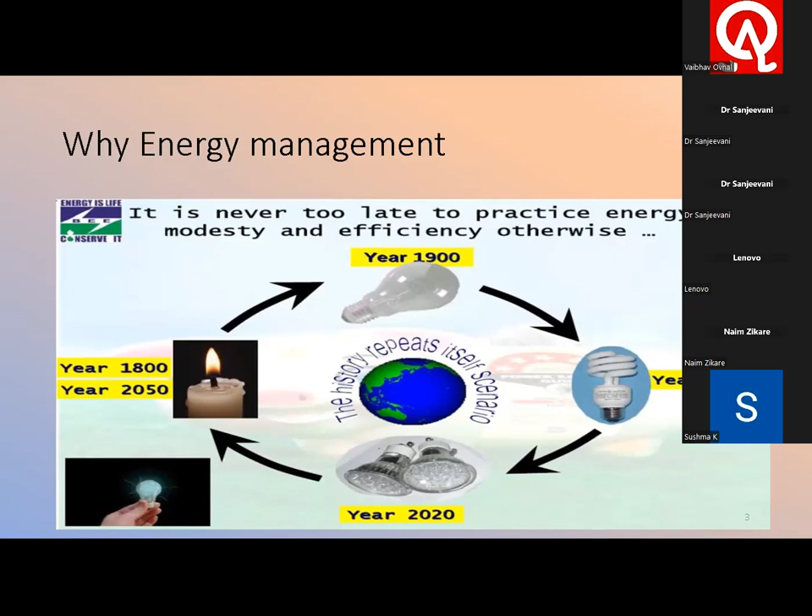Team, all of us can manage to read by candlelight, or rather we can cherish candlelight. But can we run machinery on candlelight? Of course not. So unless we take some proactive steps for energy management, we will no longer exist in the business. So in a nutshell, energy is a lifeline for our business activity. If we have to be in the business, we have to be energy efficient.

Now, understanding the management system 50000 family. 50003 gives you the guidelines for the direct and indirect impact calculation for certification and the related customers, how they should be evaluated, talking about the controls on the certifying body. 50001 is the accredited certifiable standard.

50006 gives you the guidelines for basically working out the baseline, and measurement is derived through 50015. 50047 talks about how to calculate the energy saving. Most of the time, measurement and instrumentation plays a big role.

There is always measurement uncertainty, or there can be a conscious misrepresentation, what they call greenwashing. In real life, energy is not saved, but it is projected as being saved. Such misrepresentation has to be avoided if you're going to claim benefits associated with the improved version.

Of late, efforts to claim the benefits associated with green efforts have triggered some malpractices. And to prevent such things getting certified, we have more and more stringent guidelines coming up. So all of us who are professionals in management systems need to know these fundamental standards and start working in whatever role we wish to perform, maybe as an auditor, a trainer, or an implementer.

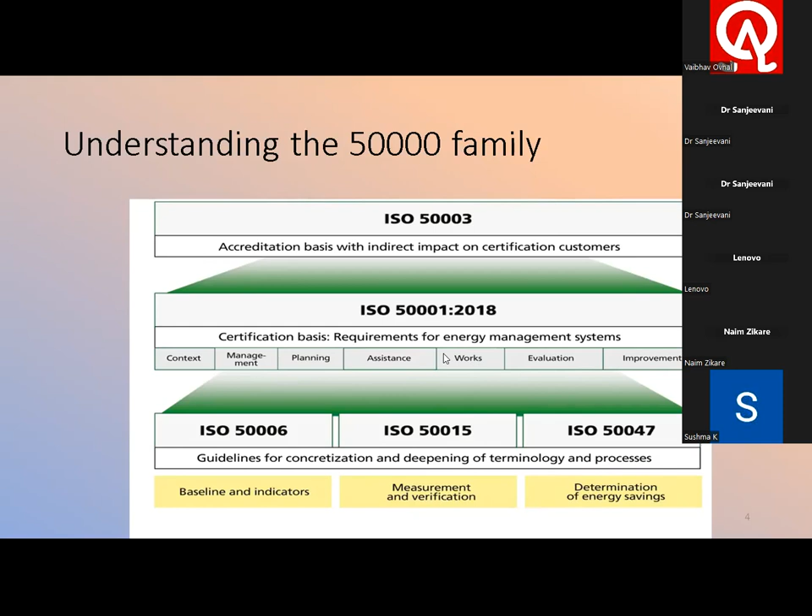Well, 50001, as a 2018 standard, follows the same higher level structure, starting with the context, top management commitment, planning in clause number 6, then the support systems, actual execution or operational control, the assessment, monitoring, evaluation, and improvement. So although the higher level structure is identical, let's understand how and why it is different and how we should act on it.

So this is a major enabler for an organization if they really wish to contribute to their own profitability, to employee discipline, and indeed to society. So I would say that 50001 is a triple win. Fundamentally, it calls for establishing systems and processes which are energy efficient. Once you have established them, you have to continually improve, because sky is the limit. Or if you permit me to say, when we talk about improvement, even sky is not the limit.

So the focus areas should be energy efficiency, energy usage, and energy consumption. These are the three key terms used in energy management. There is always some energy loss, and that's why energy use and energy consumption are never identical. Ultimately, this loss function can also be expressed through energy efficiency.

All of us need to know these things as an auditor or as an implementer, depending on the type of energy we are using. I started my career with Thermax, and with Thermax, a simple change of a flaring burner design or a fuel, that is the coal design, or the process of burning, that is a fluidized bed, have changed the efficiency considerably. I'm not talking about economizers, I'm not talking about any other recovery mechanisms. But then each small contribution by energy saving matters a lot.

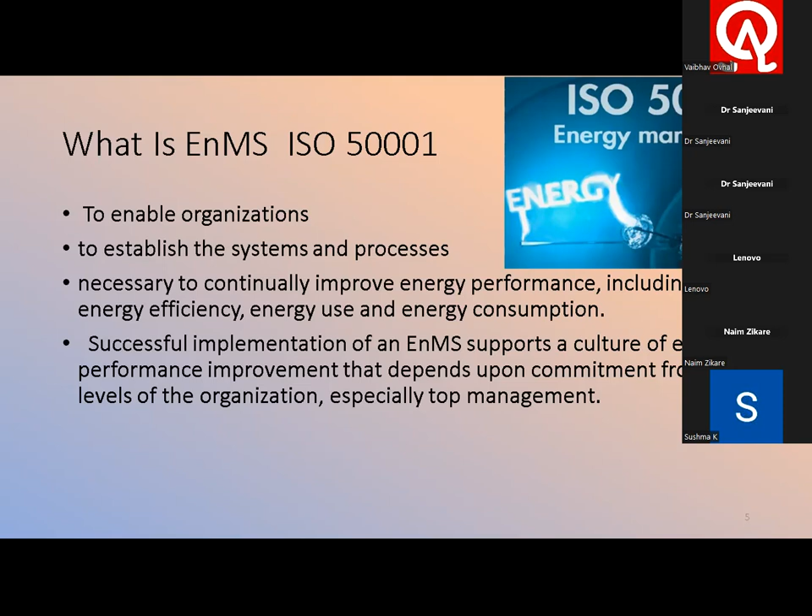So typically when we are talking about the PDCA mapping of this energy management system, it starts with the internal and external issues. And in internal and external issues, indeed, we are deriving the needs and expectations of the interested parties. So the proper efficient machinery. In fact, certain machinery after the life is over, people tend to sell it off, and there are people who are willing to buy it for the capital cost investment. But there is always a trade-off. What is the working cost? If it is not energy efficient, you are going to end up spending more over time.

So, well, the needs and expectations right from the top management in terms of costing, the performance the machine should be working at, that is the employee productivity, and the end result, that is the end customers and the suppliers. So all these have a direct and indirect linkage with your energy performance or the machine and equipment performance. So all these factors you have to consider and use a strategic direction, because as a leader, you don't have infinite funds. You have to navigate through and really utilize the best possible options that you have.

So the leadership role is at the center, and they take the strategic directions and come out with proper guidelines through the policies and objectives and schedule the plans up to an actionable level. So clause number 4, clause number 5, and clause number 6 together form the part of planning. Then we have the support, that is the infrastructure that is required for the execution, as well as the operational controls that are laid down based on the baseline reviews. That is a part of doing.

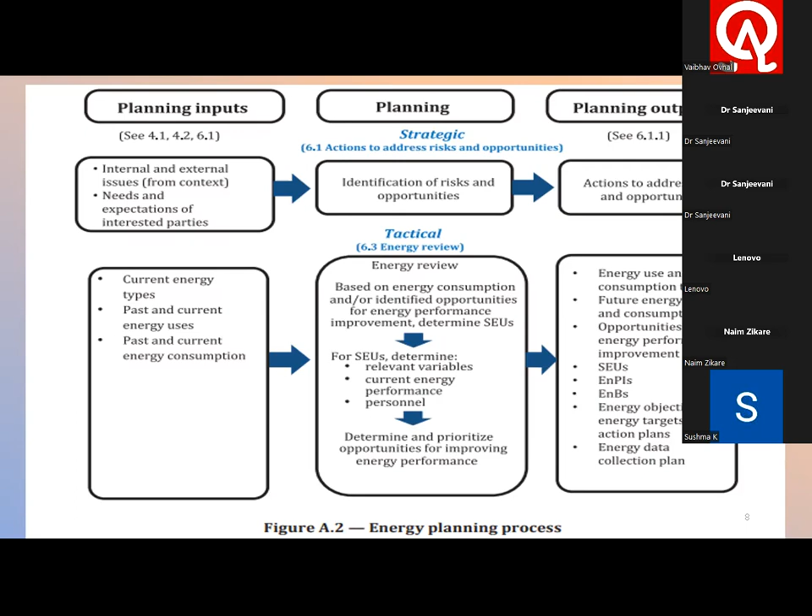So obviously, the core clause that all of us need to understand directly, or hire some expert to interpret, is proper interpretation of the energy review. So the consumption is based on measurement, and when we talk about measurement, as I said, there has to be a clear measurement system analysis. The accuracy of the instrument, the uncertainty, the R&R errors, everything will have to be taken into consideration. The critical data.

Then what are the types of energy? Obviously, it need not always be electricity. It can be fuel based. It can be diesel for the DG set. It can be coal or any other briquettes if you're using a boiler. So it depends on the various types of energy that you're using. Also look at the trends and the future consumption. And ultimately look at the significant energy uses, because these are the key areas where we need to improve. They will be the key contributors to our performance.

Ultimately, you have to start defining the variables and always look at what is my current, because all your benchmarking starts with current performance. The people, because as I said, people play a major role and can influence the controls. Then the prioritized opportunities, because you cannot do everything overnight. It demands time and funds. So you have to prioritize. So the ultimate priorities that you have defined and the projected future energy usage or energy consumption.

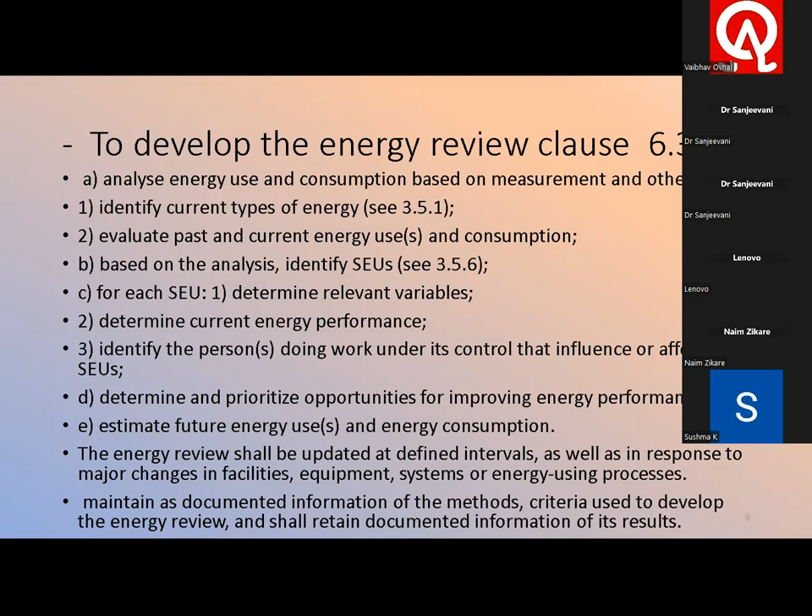Once we have identified it, we know the key controls or the key targets. They are known as the performance indicators. And once you have identified the proper indicators, which are appropriate to measurement and monitoring, we can always enable the organization to demonstrate their performance improvement.

Because what you are checking at the output need not be the same at the input. What you measure at input is your consumption. What you measure at output is your utilization. And the difference between the two is a loss. So the device that you have used for the input measurement and output measurement, the method that you have used, also need to have an equivalence established.

Because there is every chance you are giving an energy in the form of electricity and you are getting steam generated. So the calorific value calculation, correlating the two different forms of energy and defining the performance indicator, is a pure engineering or pure scientific calculation. Any small error and any improper uncertainty in the calculations will give you misleading calculations or misleading enablers, triggers. So this becomes very, very critical.

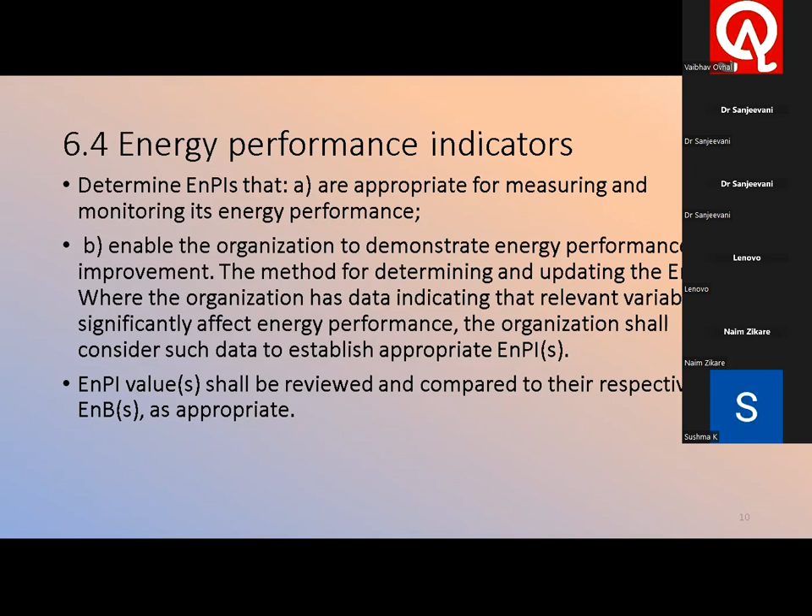The most important concept in the energy management system is the baseline definition. Most organizations don't have baseline data. So the first exercise we start is collecting this data and conducting an energy review. The time period we consider can be 3 to 6 months. At times, if the processes are too complex, we can extend it to 9 to 12 months. Then, after collection of this data, we identify the variables. These can be variable loads, seasonal changes, or many other factors specific to the industry under consideration.

And then we work out the static as well as dynamic performance over the time span. We carry out the normalization of the performance indicator values to the corresponding baseline. As I said, the input can be electricity or fuel and the output can be the steam generated. So this calorific value getting converted into energy equivalent becomes very vital when we are trying to work out the energy efficiency. Depending on the nature of the activities, it can be a simple adjustment or complex calculations. And this is exactly where computerization, cloud computing and various applications play a major role.

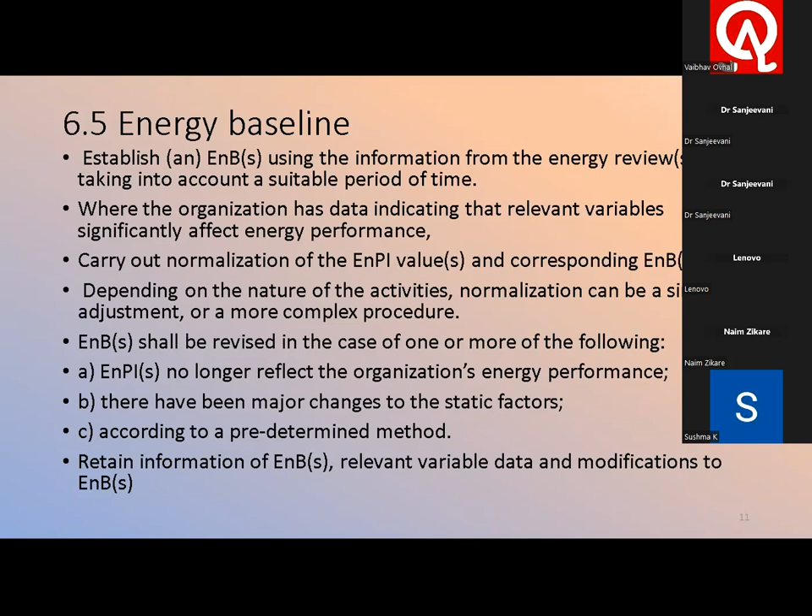Once we have the correct data, what we are going to do is devise the methodology about sustainable data collection, define the roles and responsibilities, and how best this data can be sustainably collected through an action plan depending on the size, complexity, and resources.

And various measuring devices and monitoring equipment we are going to use to have clear identification of the key characteristics and how it can be retained for further demonstration of your compliance, or evidence of your compliance, relative to the SEUs, that is, significant energy uses. Also, you have to focus on the consumption and the operational criteria, static factors, as well as the action plans. So all this data gets monitored over time internally and of course externally through the audits.

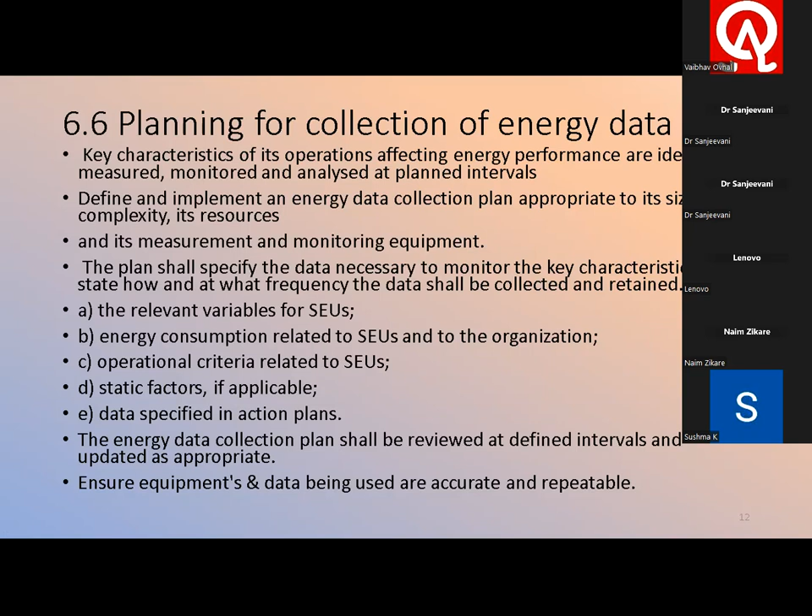The importance of the energy improvement demonstrated through a dedicated execution program, as well as the repeatability and accuracy of data, plays a vital role. So once this is done, the core activities as far as energy management are over.

Now what we are going to address is routine management system related activities like resources, competencies, awareness, communication, documented information. Those of you who are familiar with the support system, I'm sure I need not elaborate it at all. But those of you who are novice and new to this field, let me elaborate very briefly. When we talk about resources, we talk about 4M: man, machinery, methods, and material being used. Each of them has contribution and impact on energy consumption.

The competency of an individual, the equipment efficiency and the upkeep, the material which is causing high losses or otherwise, they're very, very critical in this whole process. A small change in the material properties can really impact. The grade of the fuel being used can impact the energy generation and the consumption and the losses and the wastages. All of you are very familiar with this, right? So having that awareness matters a lot.

A single energy improvement drive I can share. We have Katraj Doodh Dairy very near our setup, and we have been helping them out on energy efficiency. They use briquettes as boiler feed. That's a waste generated from agriculture that is processed and then used for burning as a fuel. Suddenly we realized there is a heavy loss and the efficiency is reduced. And when we checked it, we realized the briquettes had absorbed some of the moisture.

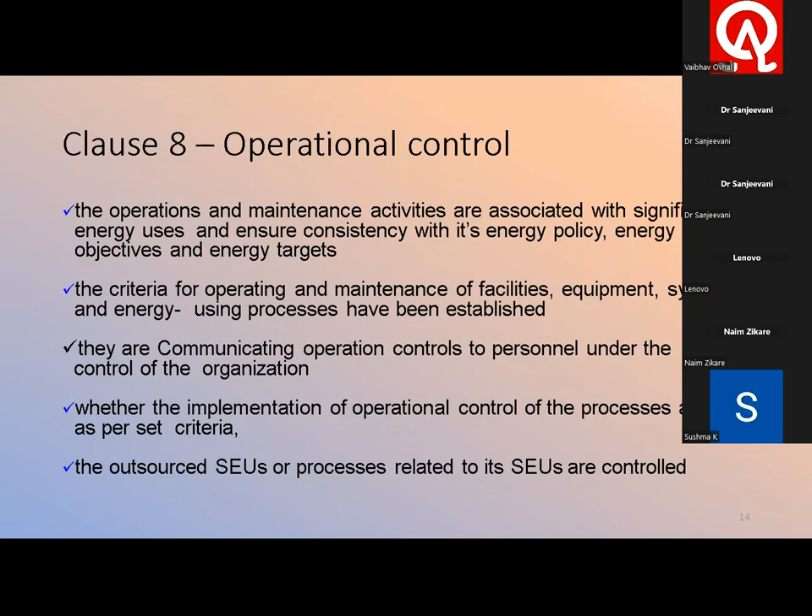Ultimately, defining the operational controls once they are established and monitoring them, supervising them, and ensuring they are well established as per the set criteria is, of course, the fundamental requirement. And in certain cases, we realize that our team is not competent, we may have to outsource it. So such outsourced significant energy uses also are our responsibilities. They are our babies because we have got the support from external parties. So we need to address these points also equally well.

If you all remember a simple change in design, I told you the methodology of burning the fuel, having a fluidized bed, having a vibrator, switching over from briquette to coal or vice versa, a different grade of coal. These are all design inputs. And they matter a lot when it comes to selection, modification, or renovation of the facilities, equipment, and the systems.

A small change in the basic flaring, the boiler flare design, will impact your efficiency in a big way. And same way, switching over even the lighting and using small motion sensors will impact your energy consumption pattern in a big way.

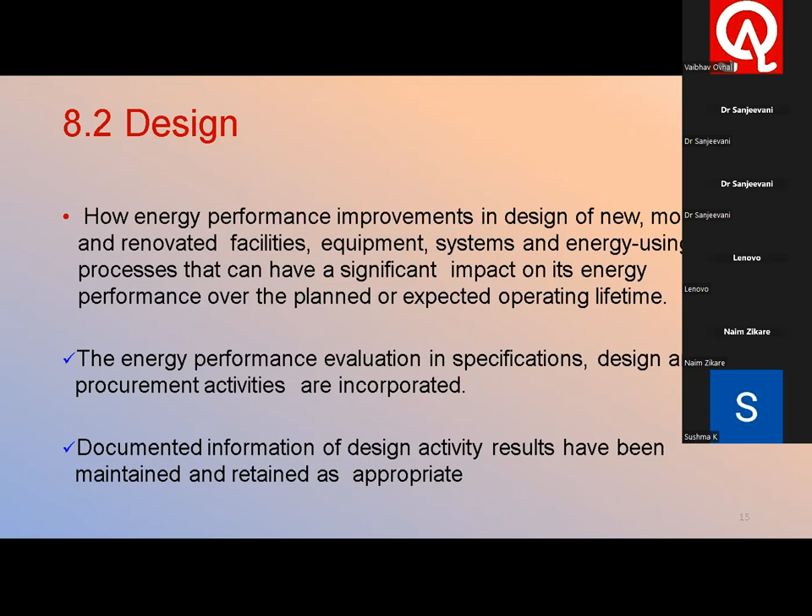So basically your performance evaluation, specification, design and procurement, they all have to go hand in hand when it comes to operational controls. The documented information of design activities and the results that you have achieved has to be audited internally, and they become very critical external audit parameters.

As I said, the procurement also should have a consideration about energy performance. Most of the people go by the cost, lowest bid is a requirement. But you have to see cost as a whole life cycle, not one time, that is a purchasing cost. If at all it is going to have a poor energy performance, the consumption over time will be very, very poor.

I'm working with a very small electronic company. It's a micro level company called Milux. They're in the lighting system. And they have a lot of computerized controls and they're patented products. Of course, they're all LEDs and LCDs. But when I was talking about the procurement, they expressed that most of the electronic components, they're trying to buy from OEMs. But in between the COVID days, they had to depend on local traders.

And believe me, there were some spurious LEDs which impacted the performance. And when it comes to testing of electronic components like LEDs, the only method that you can have is it works or doesn't work. At the most, you can check the energy consumption. But how it will work at a heated temperature or in a continuous life test, we don't have the time. We just go to the market and define the specification in terms of the current, size and the looks, red or green LED, that way.

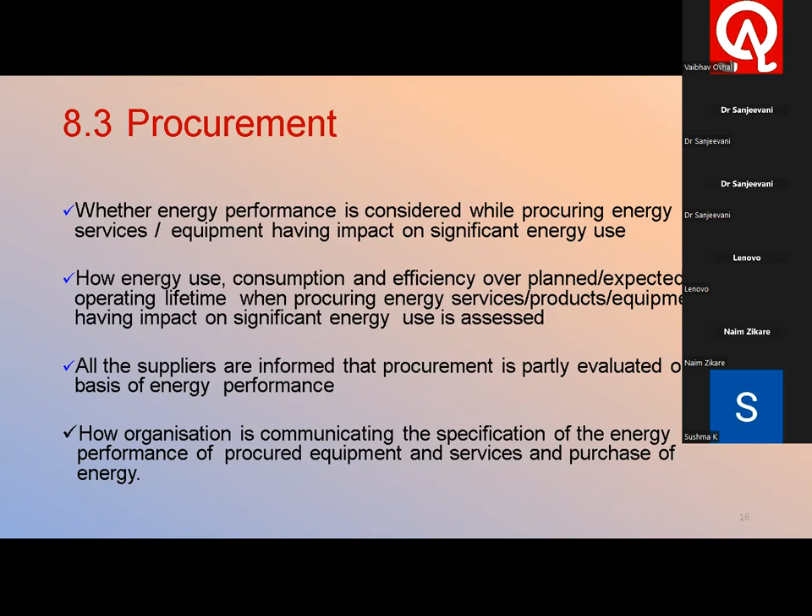All right. Yes, ma'am.

And believe me, this improvement is not only cost saving and contribution to environment, that is the society in general. This is tremendous motivation to your workforce. "We can do it" is a great trigger or motivation for your employees. So once they have achieved it, they will always like to do better and better. Nothing succeeds like success. So it can be a very good technical and intellectual as well as behavioral trigger for your people.

I would strongly suggest whether you go for EnMS, that is energy management system, or otherwise, take up some energy management projects as your organizational strategic direction. Whether you go for environment, energy, IMS, ISMS, QMS, it's your choice. But energy control, or energy management, is no choice. It is a fundamental requirement for your organizational existence.

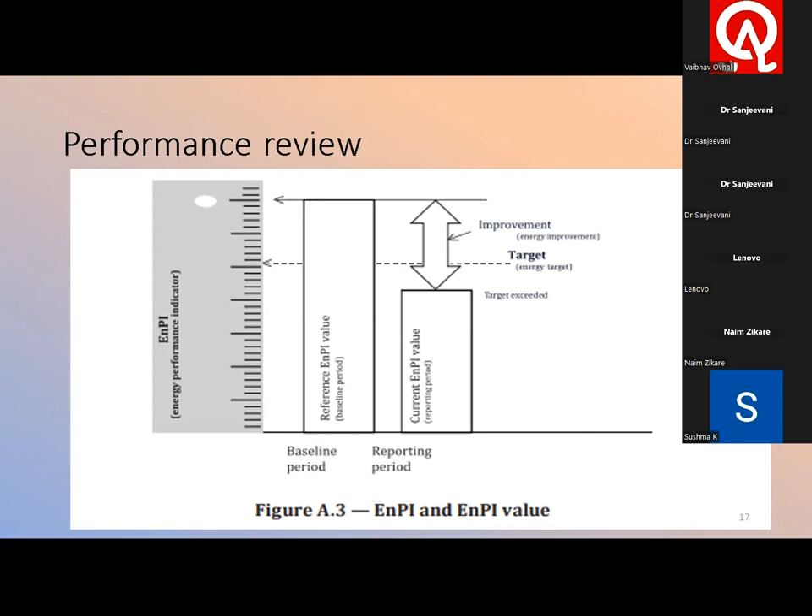Well, team, coming to the next clause, that is the monitoring, measurement, analysis, and evaluation. Obviously, we are going to follow the parameters, that is EnPI, baselines, and the reviews as a part of your monitoring measurement. You're also going to have the system reviewed through internal audits and improvised wherever required, and ultimately have the timely management review. The explicit requirement of management review in this standard we are going to discuss a little later. But let's understand the methodology required.

Firstly, you have to set the system by defining the frequency, and this frequency should be dynamic, but also fixed time, whichever is earlier. Then responsibilities, who is assigned the measuring responsibilities, because this needs competence. Measuring electrical current without competence would be a suicidal attempt. The same thing applies to thermal or any other energy. Energy is always a high risk. So competence plays a major role.

Then the analysis, this needs statistical expertise as well as instrumentation and measurement expertise. So it can also be application driven. So clearly define these things. And then you have to define the criteria, how the results are acceptable or not acceptable, how they are going to be evaluated. This should be documented. And then what are the actions you have taken? So this is again a PDCA built in based on competency. And deviations always trigger improvisation. So this is overall the check part of the energy management system.

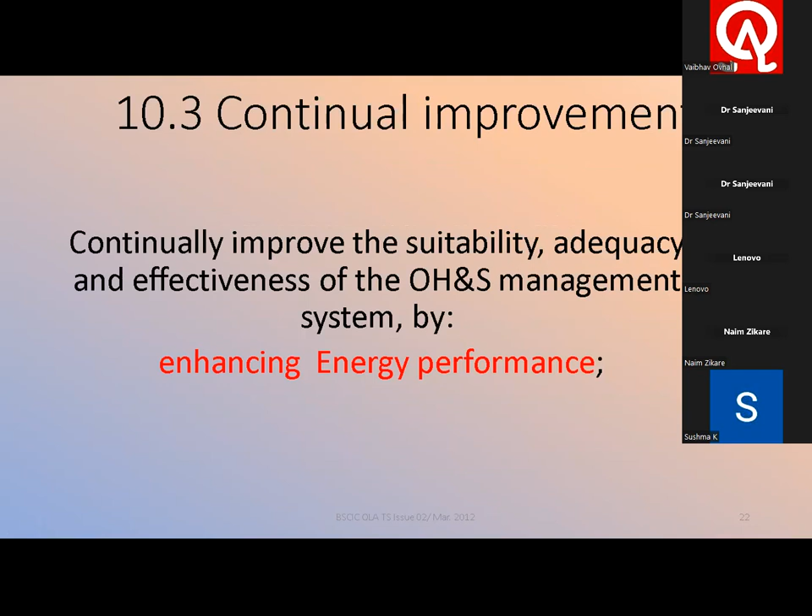Indeed, we have to learn from the mistakes, trigger the improvisations, and ensure that we enhance our energy performance day by day. If you can do that, we are ready for certification. But believe me, certification is not the only goal. If you really want to have a focused strategic guideline through a policy, then the targets, proper data demonstrating the things, a proper measurement system and the equipment used, timely review for the substandard acts, substandard controls, and improvising on the energy management put together will mean 50001.

Sounds quite logical. But believe me, it takes a lot of time to identify if there is a gap. If you start writing the energy balances and identifying the gaps, it's a massive exercise. And I don't want to threaten you all, but yes, it needs a lot of deliberate efforts and timely monitoring, identifying and improvising. But it's challenging. Once it is proven, you really have a great intellectual satisfaction and a pleasure. Tremendous teamwork and tremendous triggers, self-sustenance come thereafter.

Well, certification becomes incidental, but what is more important is we establish a system of compliance, safety as well as energy culture, a transparent, objective, dependable, and improvising process. As I said, nothing succeeds like success. So if you take it up as an improvising culture and learning organization, the employees are engaged with you. They feel nice, happy, and proud to be with you.